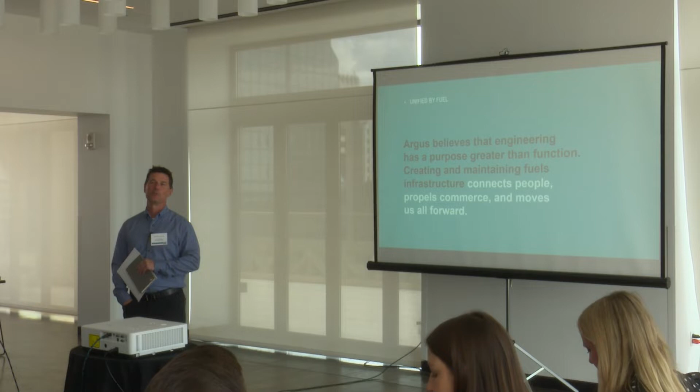A bit of current events, what's going on in the industry, sharing from our perspective what's going on and what you guys need to be thinking about and considering. And then also taking an opportunity to go to the balcony, the 30,000 foot perspective, of some of the issues that have plagued the industry, and what we're doing about it. That's what we always try to accomplish, a bigger picture away from where we normally are in consortium meetings.

There's other business that we're focused on. With this event, the idea is to share on those issues, what are we doing as an industry, and how can we get better. And then lastly, most importantly, is the networking part, which we just kind of did. We probably could have stood here for another 3 hours just chatting, but we'll do the Royals game.

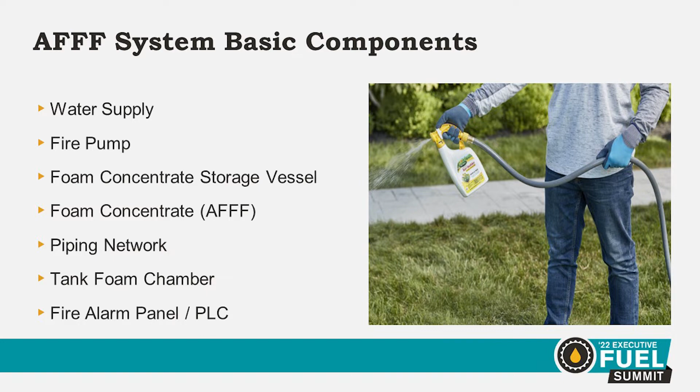Second is a fire pump, because we need a lot of pressure. We don't need the pressure for the foam system itself in the tanks. Where we need the pressure is for the cooling nozzles on the adjacent tanks, should there be a fire.

Foam concentrate storage vessel, that's where the big steel drum, the foam concentrate, the liquid that's in it, and we're talking AFFF now, today, because that's the FAA 139 rule. It's going to change, and it's going to change soon.

The piping network, so we've got the foam piping that goes up to the scuppers in the top of the tanks from deluge valves, and we also have the cooling water, which doesn't have any foam in it. The tank foam chamber, and then the fire alarm panel, which is the key to this whole thing.

It's a PLC, and it directs, depending on what you've selected. Say, for example, there's a tank 3, a fire in tank 3. By pulling the alarm, the pull station for tank 3, you activate the foam for that tank only. But you also activate the cooling nozzles for the adjacent tanks, all done through the PLC.

So the operator activates the manual pull station, the fire alarm panel, which is incidentally UL listed. It's a fire alarm panel, but it's UL listed for what they call releasing devices. So it's got special circuitry in there to monitor the release of the foam and the deluge nozzles, the deluge valves. Water flowing past the foam inductor draws foam into the water.

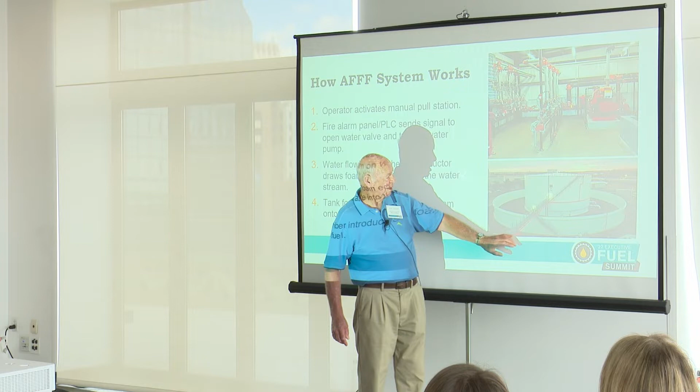And then typical, as we all know, here's the fire water, or the foam line coming across the bridge, around, and then up the side. Depending on the diameter of your tank, you can have 1, 2, 3, or 4 foam makers at the top of the tank.

Typical layout. So there's 4 here, 4 here. This is subsurface. We'll talk about that in a second. So here's your foam control building, just the lines feeding out, and it's all operated by the fire alarm panel.

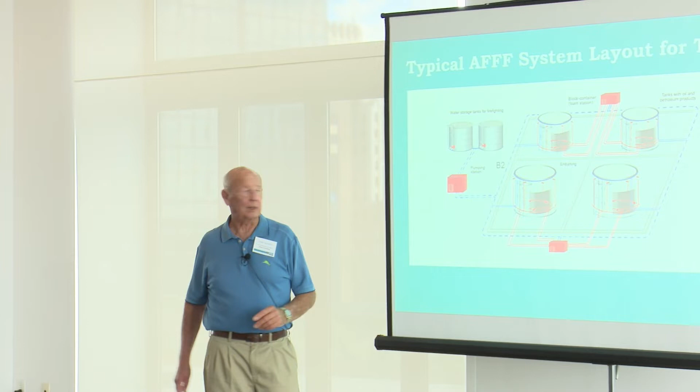These are top foam systems. This is a show of a bottom injection. So we can either have foam coming in the top, which is the normal way of doing it, but some of the older technology had bottom injection.

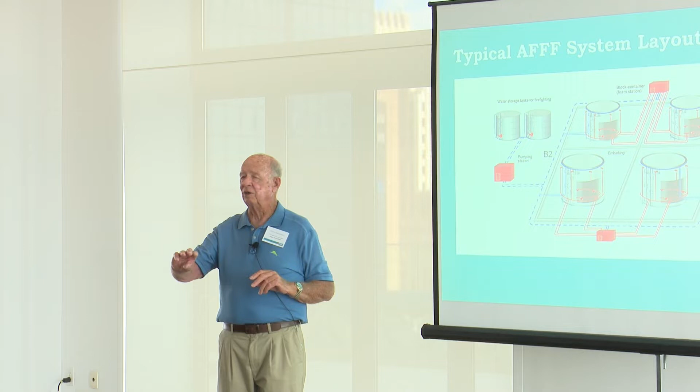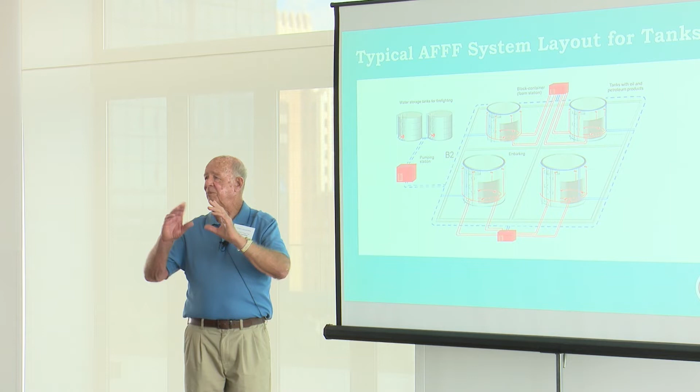And the way that works is there's a pipe and then a diffuser inside at the bottom of the tank. But where the foam pipe enters the tank, there's a burst disc. And that's sitting between 2 flanges, kind of like a blind flange, but it's a burst disc.

And if the system's called upon to operate, the excessive pressure from the fire pump bursts that disc, and allows the foam to flow in at the bottom of the tank and then float up. That's older technology, and one of the reasons it was used was in case there was any physical damage to the top of the tank, you'd still have an ability to get foam into the tank.

So we deal in maybes. Maybe there's a plane incident and it takes off the top of the tank or smashes into it and takes that foam system out. Or maybe there's a lightning strike which causes a serious explosion which could take that out. Very, very unlikely, but that was the idea behind this technology.

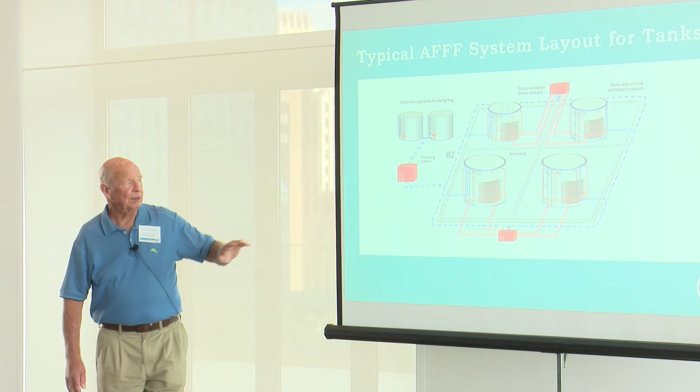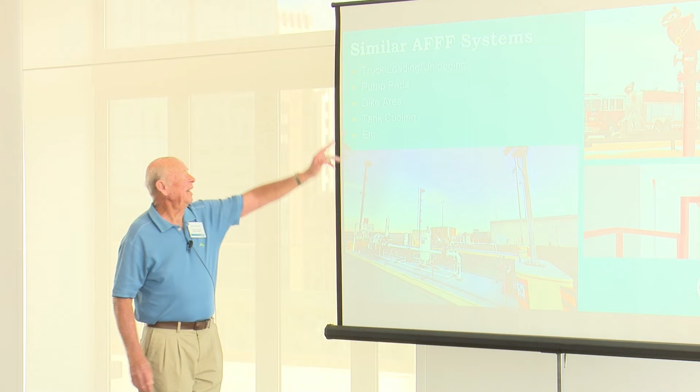Pump pads, dikes, tank cooling, and miscellaneous things. This is an example of a tank cooling nozzle. Depending on the diameter of the tanks and the shell-to-shell distance between tanks, we either have 500 or 750 gallon nozzles, usually 2 per face, so that we can adequately cover the side.

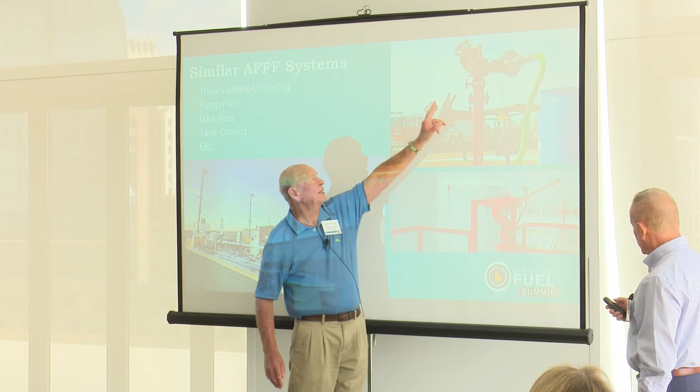So this is for a truckload, unload, or a pump pad. This is actually a foam nozzle, and you can see this is the line that draws the foam from totes or 55-gallon drums, draws it up. It's a manually operated system, usually by the fire department. You don't see them very often, but they do exist.

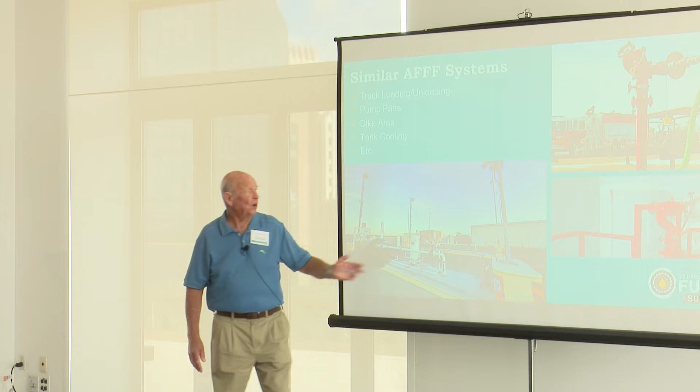And then this is obviously a filter pad, pump pad with nozzles, ultraviolet. These are UV-IR, ultraviolet infrared detectors that watch the pad, and they activate the deluge valve, which sends foam to the nozzles up on stanchions and basically just drowns it.

Questions? Everybody cool with that? All right, Joe.

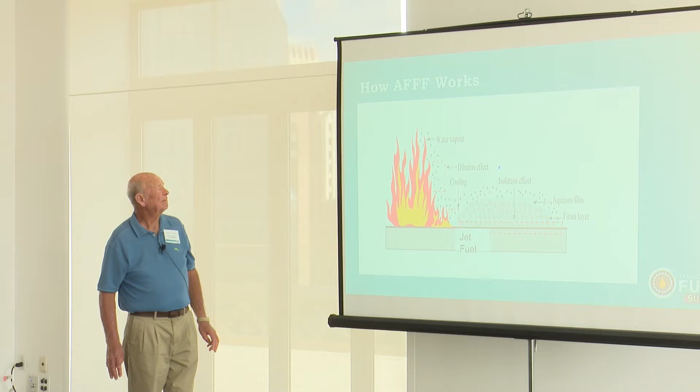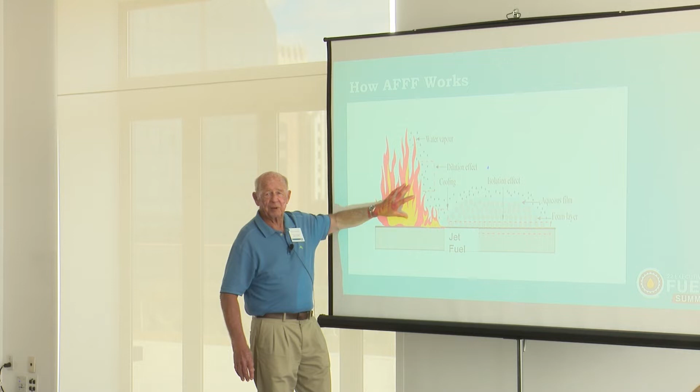Here's how it works. So you've got a fire. We bring in the foam, and what the foam does is the foam layer has got a surfactant in it, which is what's really the problem now. It's the fluorine surfactant, which allows that foam to race across the surface of the fuel. That's where the PFAS comes in. Then it isolates, cools, and draws over the top of the fire, occluding the oxygen and basically controlling the fire.

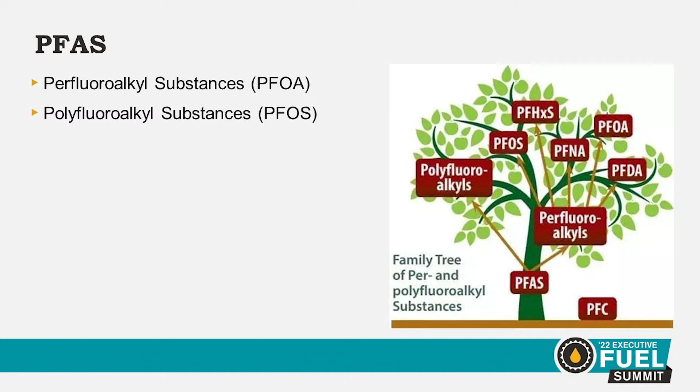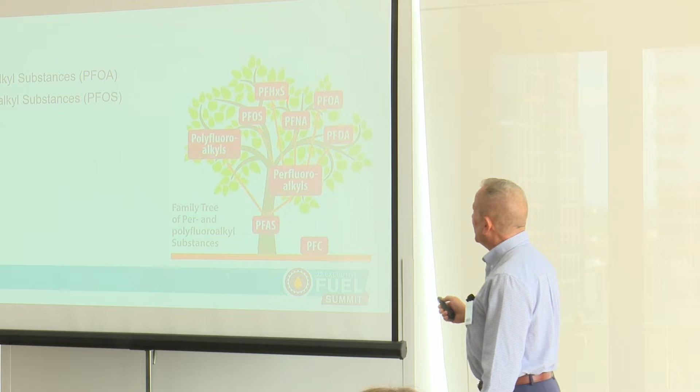Here is what I call the family tree. When I first got involved in this in Argus, it was like, what am I looking at here? This is from 40 years ago in chemistry class, and I don't even know if I studied this. But the PFAS you're hearing about today are the perfluorals and the polyfluorals. The perfluorals are up here, and right now what we're talking about at the EPA level is the regulation of PFOA and PFOS. That's the perfluorals. And then you also have these other ones off that branch, and EPA is right behind them too. They're coming for these as well.

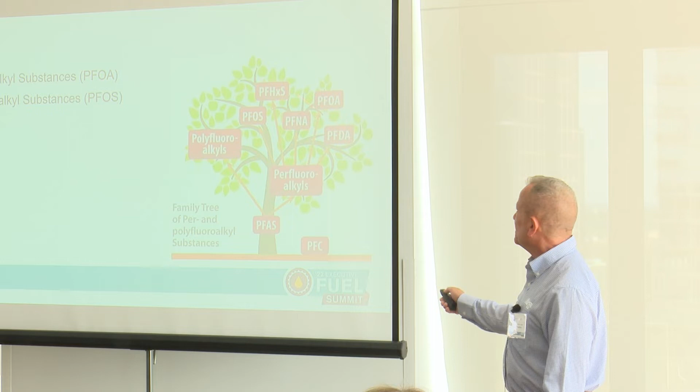And then you'll see over here polyfluoroalkyls. Those are going to be regulated in the near future as well. But the ones on the right-hand side are really what they're going after today, starting with these two, PFOA and PFOS.

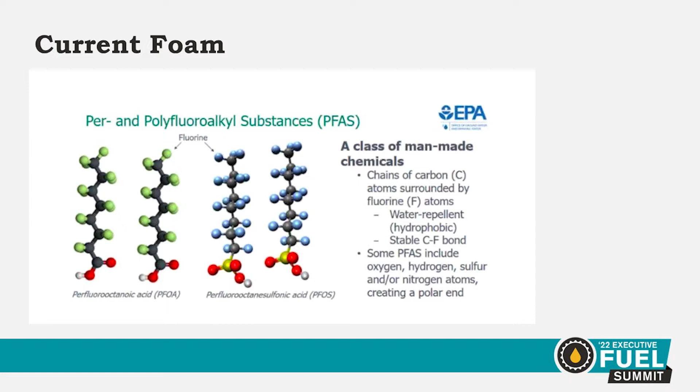Just a breakdown here of the problem we're dealing with. Here's the chemical structure for perfluoroalkyl substances. If you remember from chemistry class, you have a straight chain carbon here with fluorine molecules, either in blue or green. And at the very end here, this is what differentiates between a per- and a polyfluoroalkyl substance. Right here is a combination of hydrogen, oxygen, sulfur, and some even get creative and add nitrogen and other chemicals.

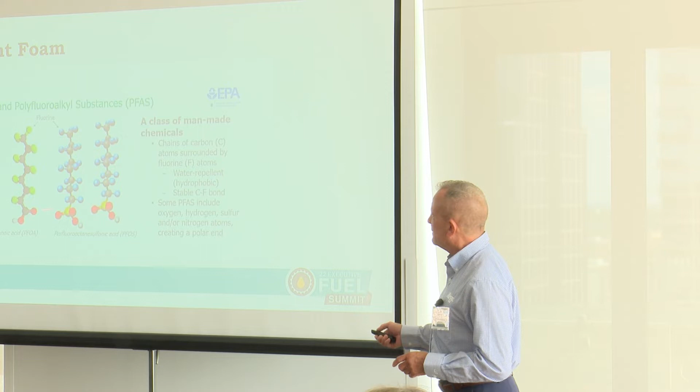The polyfluoroalkyls are when you take away a fluorine molecule here and here, or anywhere but from the end. And if you replace one of these up here with a hydrogen instead of fluorine, then you're into a polyfluoroalkyl substance. So there'll be a test on this later, folks.

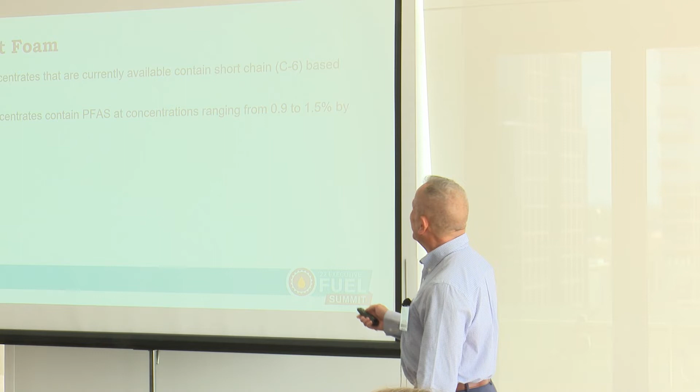As I said, current AFFF concentrates that are currently available are the short chain, C6. If you took that slide I showed earlier, which were C8s...

If you were to cut off this right here, you'd have a C6.

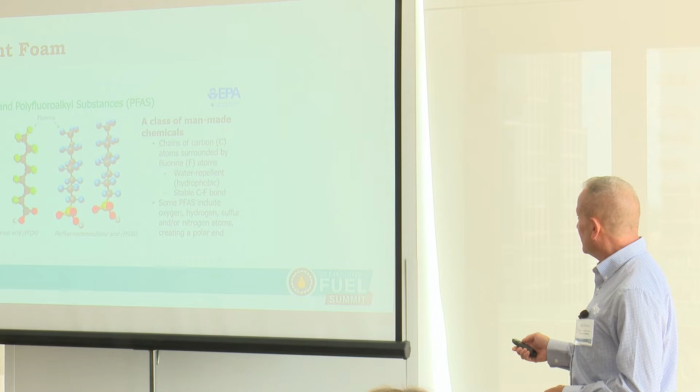And that's really the difference. That's currently what's available today for probably several more months. It's available, and that's what's in probably most of your systems, or if not, the old C8.

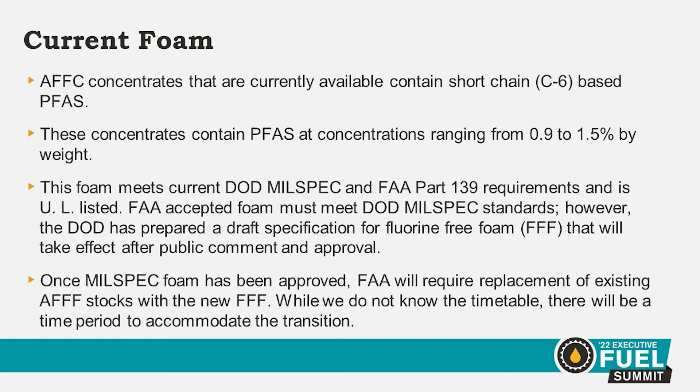Out of my own curiosity, PFAS in a foam barrel or in a bladder tank is basically only 0.9 to 1.5% concentration on average. EPA's reported up to 2% of foam has PFAS in it, so it's a very small concentration.

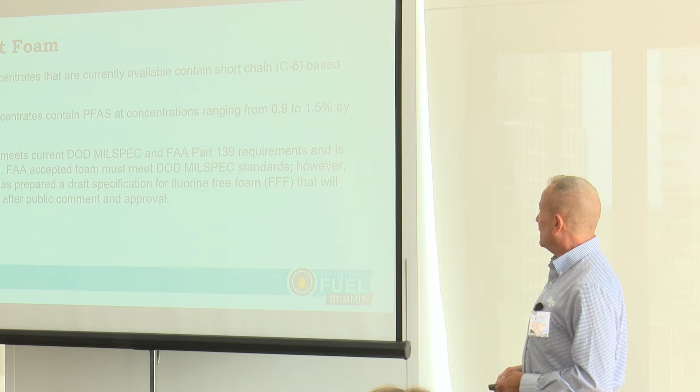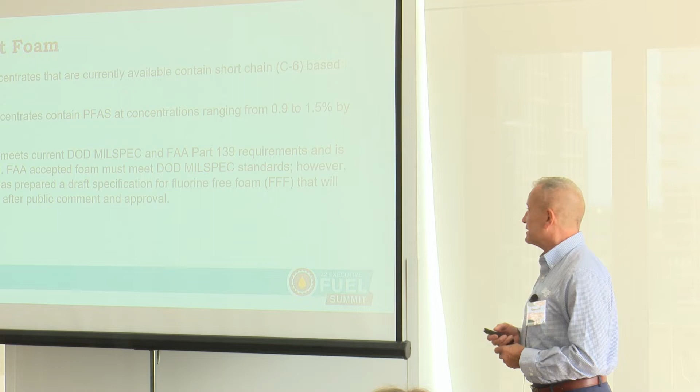The foam, of course, meets the current DoD mil spec and FAA Part 139 requirements. It's UL listed. FAA accepts the foam that only meets DoD mil spec standards. However, as you all know, the DoD is preparing a draft specification for fluorine-free foam, and that will be out for public comment and approval early next year, I believe.

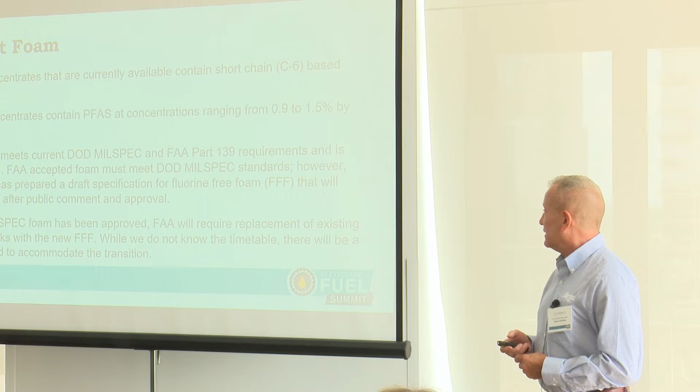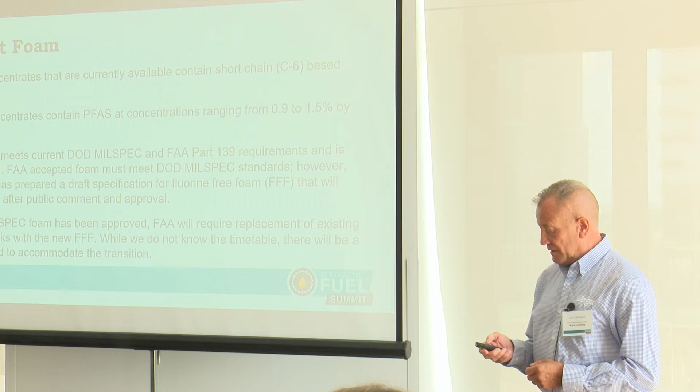Once the mil-spec foam is approved, the FAA is going to adopt that specification, and then there starts the transition to replacing the AFFF with the fluorine-free foam products, the triple Fs now. We don't know the timetable yet, but it's coming soon, very soon. It'll be next year probably, if all goes to plan at the federal level.

And for environmental concerns, releases of the C6 and C8 foam have significantly impacted drinking water resources across the United States. Once it's released to the environment, it's not easily destroyed. PFAS are not biodegradable. They're not removed by conventional wastewater treatment or incineration processes.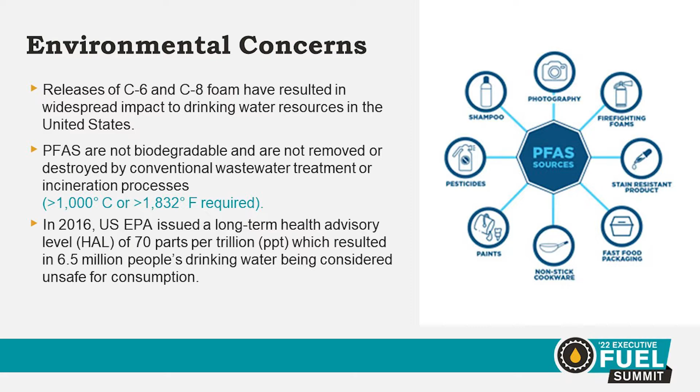You'll notice I put this here. Basically, in my research, you need to get above these temperatures to ensure that if you're incinerating PFAS contaminated media or foam concentrate, you want to get above those temperatures because there is an emissions issue from the incineration process, and they found that there's still traceable amounts of PFAS in those emissions, which is not good.

You want to try to get it completely destroyed. Some will say that they can get it destroyed up to like 99.9%, but it's a concern. So when somebody says they can incinerate it, you want to make sure that they can do thermal destruction literally at a very, very high temperature and not a conventional temperature used for non-hazardous waste.

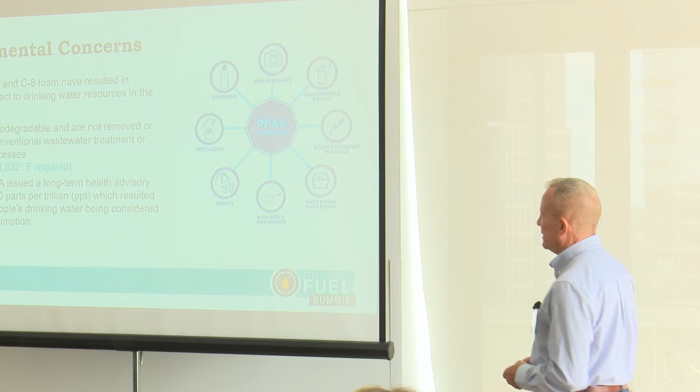In 2016, the US EPA came out with a long-term health advisory, which is not enforceable. It's a health advisory only of 70 parts per trillion PFAS. And that alone affected approximately 6.5 million people's drinking water systems in the United States alone.

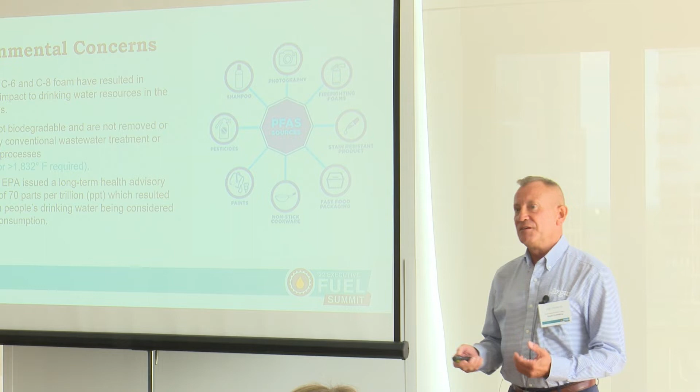When you see EPA here, the EPA, as you know, has been in a rulemaking process, and they've been going like gangbusters, for lack of better terms, for the last year. The regulations are soon to be in draft right now. They're going to be put out for public comment. But that's the extent we're going to take it, because Lloyd Landreth's going to give us an update here on the federal rulemaking and the state regulatory rulemaking processes that are going on right now.

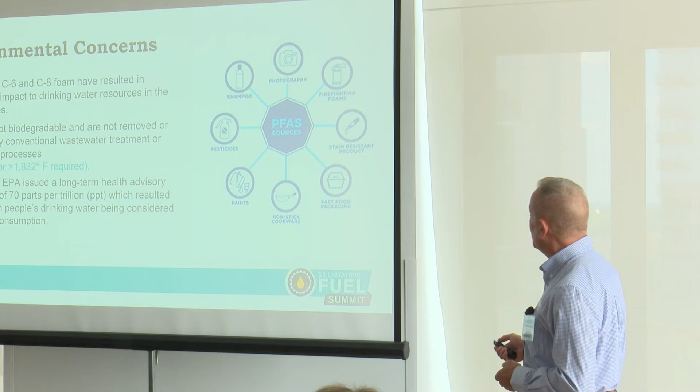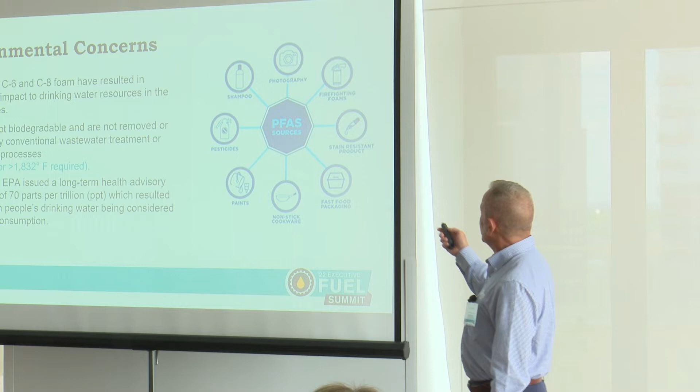On the right-hand side, you'll see here the concern with PFAS is it's not only in the firefighting foams, but it's also found in, if you can see the screen here, stain-resistant products. I mean, I love Carhartt. Now I have a closet, several winter jackets full of PFAS-containing clothing.

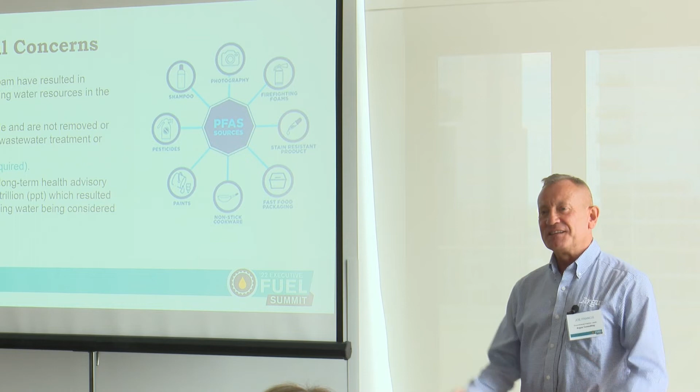Fast food packaging, it used to be the pizza boxes. I understand that still the popcorn bags in microwave popcorn actually have some in it, and so the popcorn doesn't stick to the side of the bag when you're getting ready to watch a movie. You believe that? Of course, I call this the grandfather of it all: Teflon nonstick cookware. I believe this is where the invention of Teflon has led to many of these compounds, of which the PFAS family is part.

So no good deed goes unpunished. Paints, of course, pesticides, you can find it in, even shampoo. I don't know.

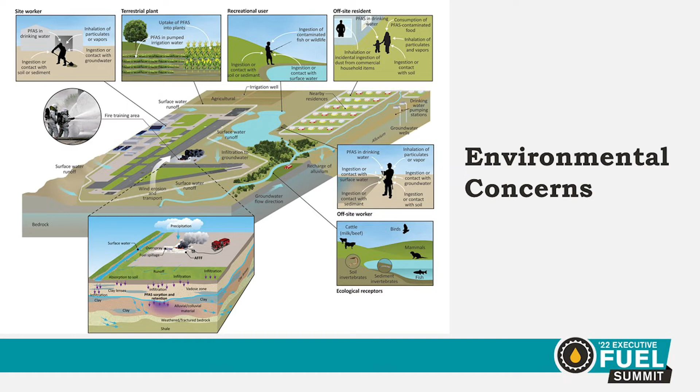You can see the various exposure pathways, how it gets into plants and animals through their diet, and then up the food chain into us. The health effects are basically cancer, liver and kidney disease, birth defects, and even impaired child growth, if exposed to high enough numbers.

If you can see the screen, there's one thing missing. Did you notice it? I have yet to find it. There's no storage tank for it. There's no tanks here.

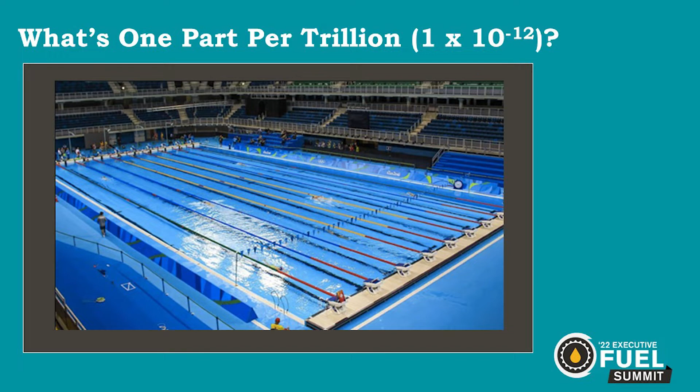So what is 1 part per trillion? Which is 1 times 10 to the negative 12th. So it's a 1 with a bunch of zeros ahead of it. Well, it's something.

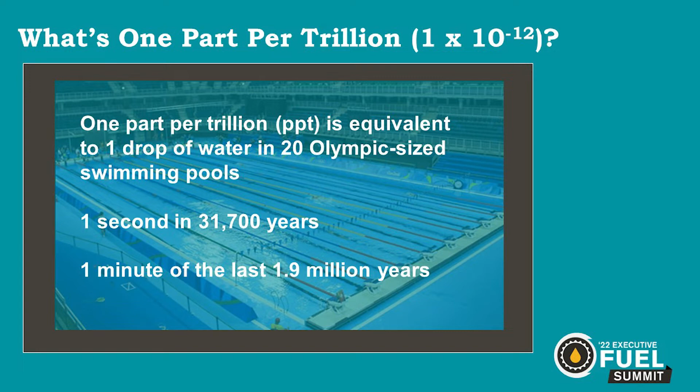1 part per trillion is equivalent to 1 drop of water in 20 Olympic-sized swimming pools. An average Olympic-sized swimming pool has 660,000 gallons. Times 20, and I think you're at 13 million some gallons of water - I'm a geologist, I'm not supposed to know that - and we're talking 1 drop.

It's also equivalent to 1 second in 31,700 years, or 1 minute in the last 1.9 million years.

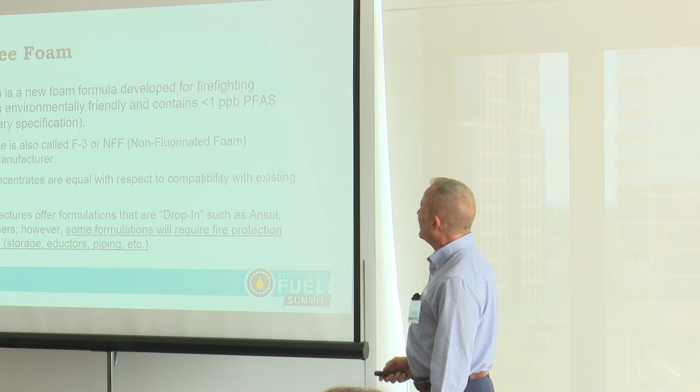So, fluorine-free foam. Now we're getting into the good stuff. It's the new foam developed for firefighting applications. It's environmentally friendly, at least it's supposedly going to be so far, and it contains less than 1 part per billion PFAS.

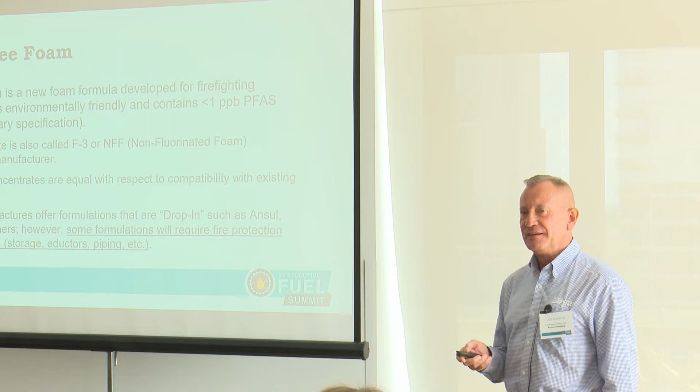Or if you read the draft military specification, less than 1 part per million fluorine, 1 part per billion fluorine. I think that may even be changed. The reason I say that, it almost seems like a high concentration, even though you're talking 1 part per billion - it takes 1,000 parts per trillion to equal 1 part per billion.

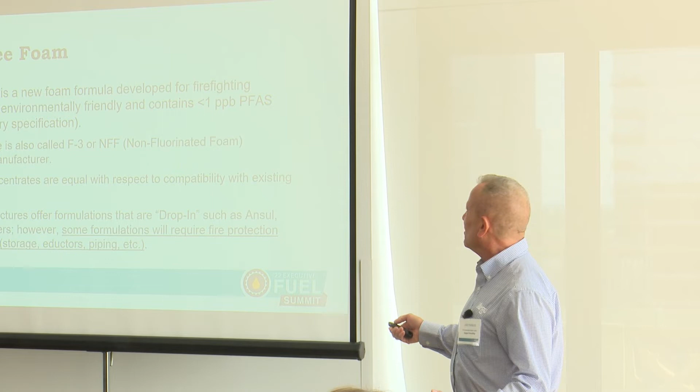The fluorine-free foam concentrate, the FFF - I'm sorry, I'm environmental, so we deal with nothing but acronyms - is also called F3 or NFF, non-fluorinated foam, depending on the manufacturer.

In the near future we're all going to be bombarded with new products out on the street. Not all these new FFF concentrates are equal with respect to compatibility with existing fire protection systems.

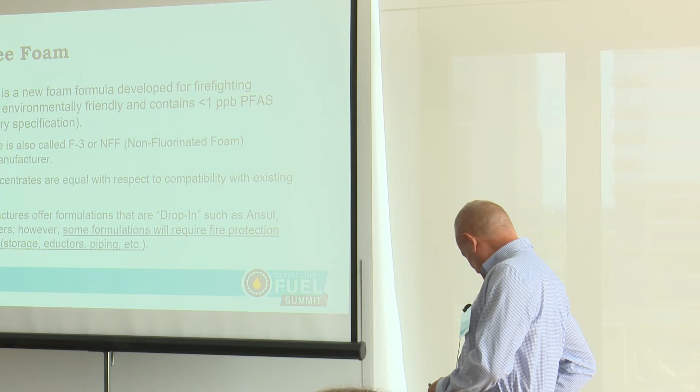Oh, I'm stealing your show. Do that last one. You got it, boss. Please step off of the ledge. I did. Oh, you did?

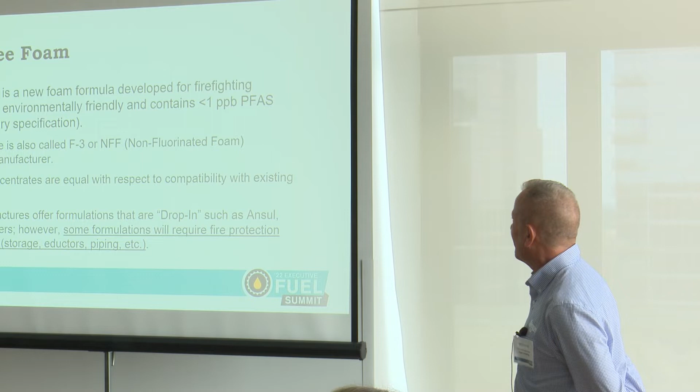So the last point here is very interesting. You have existing systems, existing bladder tanks. Some of you may have vats depending on the size of your facility, maybe a 500 to 3,000 gallon vat. For example, O'Hare Field has 2,000 gallon vats of concentrate - they're poly vats. Most of us have the tanks.

As we went through earlier, the way the foam gets into the water system, it goes out of the tank. When the valve trips, it pressurizes the outside of the bladder inside the steel shell, basically squeezing it out like ketchup. It goes through an eductor and then it's drawn into the water flow. That ratio of eduction against the pressure against the inside of the shell has stainless steel piping feeding from the bladder to the injector.

That stainless steel piping can be as small as a quarter inch or as large as a half inch. That's all contaminated - it's got the raw contaminant on it and has been since the day it was put in there. But that's adjusted for an application rate of 0.1 GPM of foam over the surface of the tank, and all that is carefully adjusted and put together on an individual basis for each of your facilities.

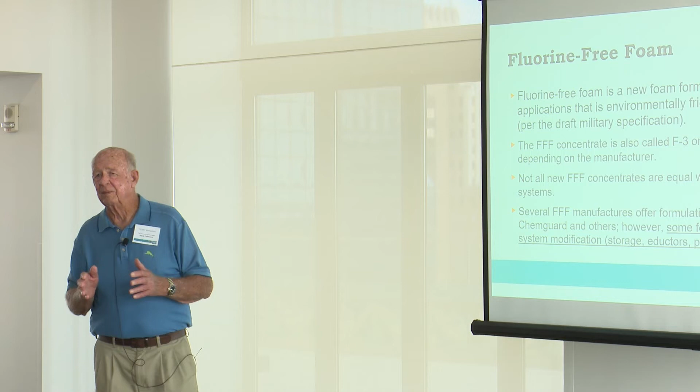If you have a National Foam system, it's a little bit different. National Foam's formula is not 1-for-1. In their UL listing tests, they found that their surfactant wasn't as fluid as some of the other brands, some of the other chemical compositions, so it doesn't flow as easily. A National Foam system would be anywhere from 1.2 to 1.8, 1.9, as opposed to 1-to-1.

That would require new equipment - a larger tank and a new eductor, larger eductors. So you may... nobody knows right now, I'm just throwing this out... you may, if you have a national system - there's no rule that says you can't put Ansul foam in a national tank. So that may be an out, but we don't know yet.

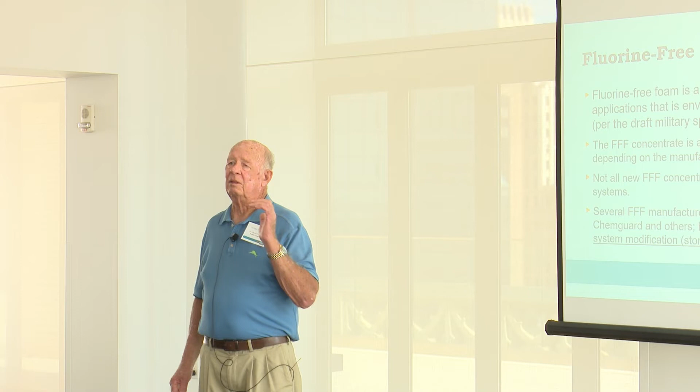National hasn't been through all of the labs and the acceptance. Ansul has. Now, for those of you with systems that have spray foam on a pump pad, a filter pad, or a loading rack - in the loading racks we would use non-aspirated sprinkler heads to spray foam up in the top of the rack. Ansul has got a product coming out late fall that's going to be a foam concentrate that can be used, once again, one-for-one, on those systems where you have a sprinkler head, a spray nozzle, or the curlicue pigtail style throw nozzle.

So right now, you've got the AFFF in there, it works. In the future, you're going to have these available to you for those systems. Well, they say, don't jump off the ledge yet - we're talking some serious money here. So, can we? All right, back to you.

Okay, under the Federal Aviation Administration now - and to help answer your question, they failed to meet their goal of October last year, I believe. Under their Reauthorization Act of 2018, they had a provision requiring the FAA to change its standards for firefighting at airports by October 2021 to no longer require the use of AFFF. In my opinion, they basically waited up until the last minute. They knew they weren't going to meet the goal, and they kind of punted over to the Department of Defense and said, you need to get this, more or less - we know you're having a spec coming, we're going to adopt that, like they did the mill spec for AFFF.

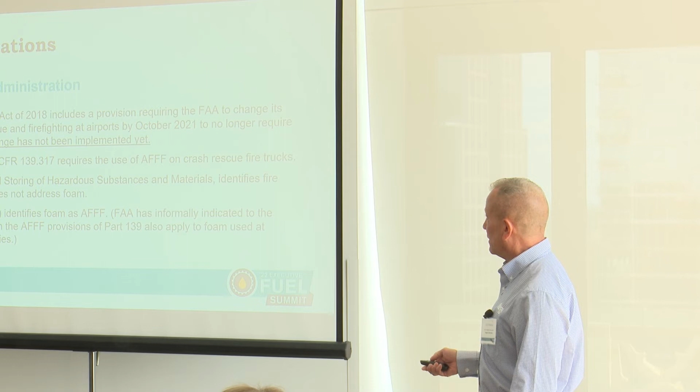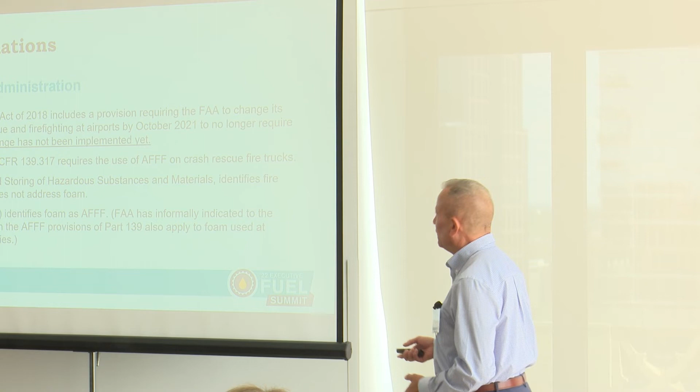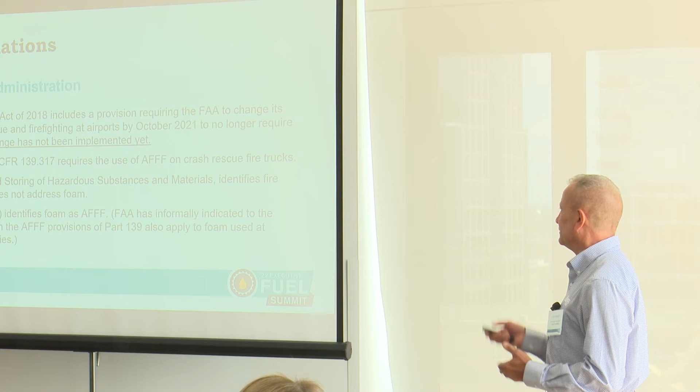And then you get into FAR, or 14 CFR Part 139, which requires the use of AFFF on the aircraft crash and rescue fire trucks at airports. Section 321 of that rule requires the handling and storing of hazardous substances and materials, identifies fire safety and fuel farm, but does not address foam. However, under the definitions of 139.5, foam is identified as AFFF. And as many of you know, the FAA has informally indicated to the airlines that, in their opinion, Part 139 also applies to the foam at the bulk storage terminals or airport tank farms as well.

So just when you thought that you had to just satisfy the FAA, look who came down the street - we've got the NFPA rules and regulations, which are, by definition, part of the fire code. So they're in the back of the fire code. It lists all of these NFPA documents as having the force of the code.

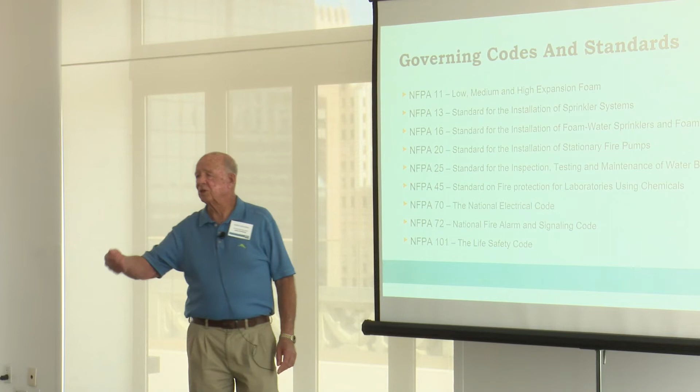So we've got the foam, the sprinklers - and 13 is the sprinkler piping system. The foam rules and regulations don't talk about pipe, we have to go to 13 to talk about the pipe and the deluge valves. And then we've got foam water sprinklers and water spray for the pump pads. Then we've got the pump. Then we have testing, then we have the chemicals. Then we have the NEC, the signaling, the fire alarm code, and a life safety code.

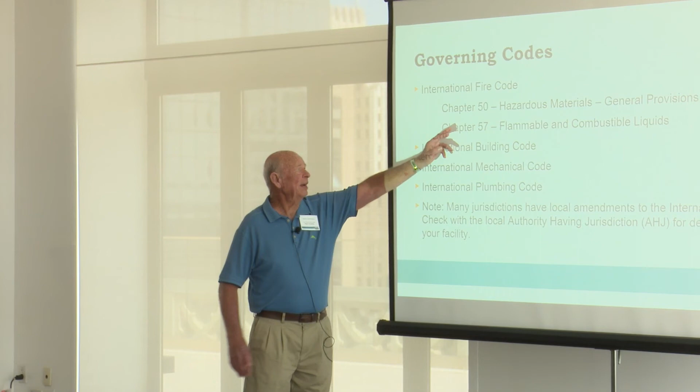And if that's not enough, we also have the fire code, chapters 50 and 57 - those are the two that deal with the subjects we're talking about here, whether it's storage tanks or spray nozzles or loading racks, things like that. The building code, mechanical code, plumbing code, and then most jurisdictions have what we call local amendments. So if it's a more sophisticated municipality - for example, the New York Port Authority - they have their own rules and regulations, and everybody else be damned.

Los Angeles, San Francisco, Houston, Dallas, Fort Worth - each one of these places takes these rules and regulations and twists them to how they want to do it. So for any of your facilities, if you want to change anything, and when we go to the fluorine-free foam, they're going to get involved. So best off, get them up front. Bring them in the day before you decide to do it and say, here's what's going on. And the fire departments, by the way, and the building departments, they're totally aware of this too because they have a lot of foam. They got to deal with it.

And if that's not enough, as Joe was mentioning earlier, he didn't have something on his big wheel - firefighter gear is loaded with PFAS. That's what makes it fire resistive. So the fire service is also in a dither about this, how they're going to handle it, because the guys put this coat on and the pants and now they're exposing themselves to known carcinogens. Cancer in the fire service is now a big problem, and it's being recognized finally as a big problem. So everybody's totally aware of this and everybody's on pins and needles. They're not gonna say, sucks to be you, because it sucks to be them too. So I think we're going to find that we're going to have a nice level of conversation to be had with the authorities having jurisdiction.

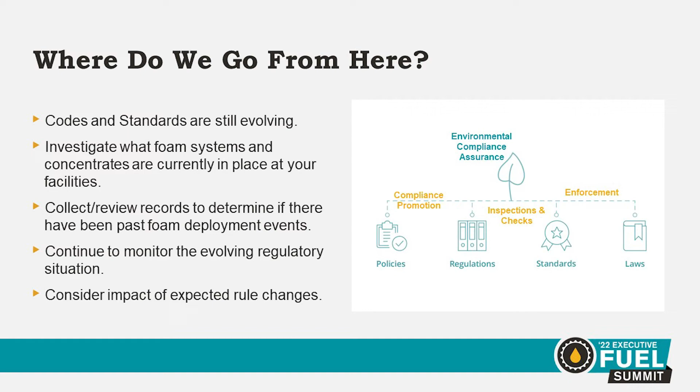The codes and standards are still evolving. We recommend that at the tank farms, the fuel farms, that the owner or operator investigate what foam systems and concentrates are currently in place at your facilities, then collect and review records to determine if there has been any past foam deployment events, and continue to monitor the evolving regulatory situation - which we'll probably know a lot more about at the start of next year - and then consider the impact of the expected rule changes we're discussing here right now. It should be, if all goes to plan, a very exciting year ahead of us.

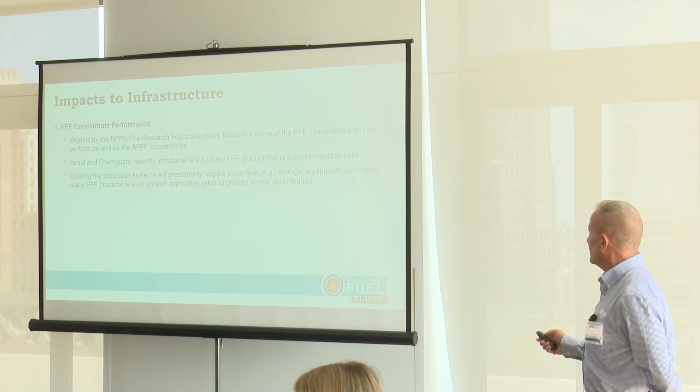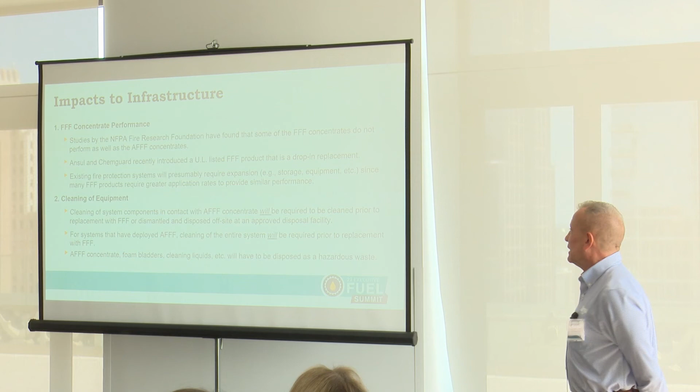The cleaning of equipment - cleaning of system components in contact with the AFFF concentrate will be required to be cleaned before replacement, or dismantled and disposed of off-site in an approved disposal facility. I don't know at this point in time what is going to be considered clean. There's triple rinses, water rinses that are being proposed to clean an existing, say, pipe - versus there's some solvents that some patents have been taken out on by consultants and so forth, seeing that this is a very ripe opportunity in the near future here, that can say that they can clean a pipe of PFAS residuals.

It's probably going to be very expensive, and either way you go, if you use a patented solvent or a triple water rinse, we don't know what that level of clean is yet, as to what the regulatory agencies are going to allow to stay inside a piece of pipe that's been exposed to AFFF and water.

You may reach the conclusion of how much you're willing to invest in cleaning a pipe versus replacement of one. That's going to have to be considered on a site-by-site basis.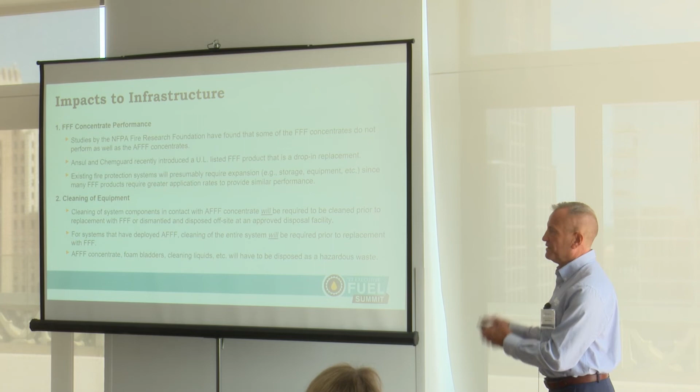Also, if your system has ever deployed foam, you're going to have to clean it or replace it. You just don't want to contaminate fluorine-free foam with PFAS residuals. And last, given though, the concentrate, the AFFF concentrate, the foam bladders, the cleaning liquids are all going to have to be disposed as hazardous waste.

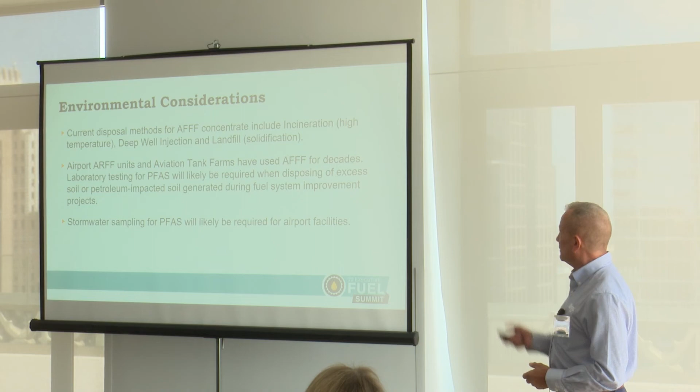Other environmental considerations to think about: right now the disposal methods for AFFF concentrate are incineration at very high temperatures, deep well injection, and landfilling the concentrate. Landfills, a hazardous waste landfill, can mix the concentrate with the liquid to make it a solid, and then put it in what they consider a secure cell in a hazardous waste landfill.

I think landfilling is the least preferred method of disposal, from what I've heard of others, whereas incineration and deep well injection seem to be the way right now to minimize your liability when it comes to disposal of this hazardous waste, the PFAS.

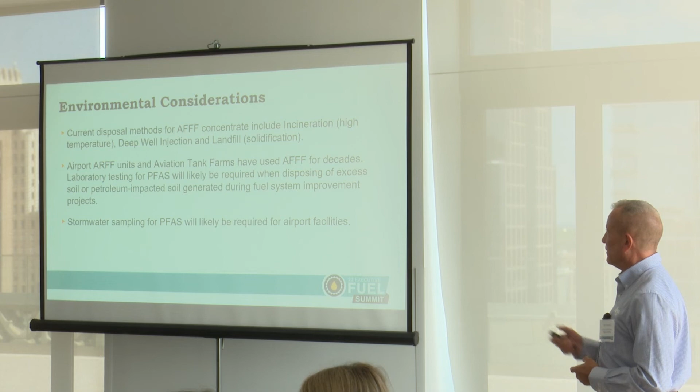One note here is airport ARFF units and aviation tank farms have used AFFF for decades. Laboratory testing for PFAS will likely be required when disposing of excess soil or petroleum impacted soil generated during a fuel and system improvement project.

In my experience, just replacing hydrant system lines, by either removing them or replacing them with newer lines, you're inevitably going to come across petroleum contaminated soil. It's not saying that it has PFAS in it, but the fact is that the ARFF units have sprayed foam over the airport as needed.

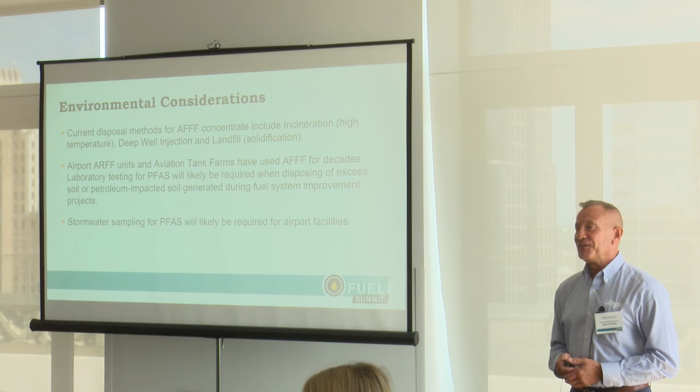An engine fire, I've seen, they really make sure that they put that fire out. And where does all that foam go? It goes right into your infields, most of which are grass covered. They have fueling pipe going through them at depth.

When we get in there to excavate and we have excess soil or we come across impacted soil, we're going to take it off to a landfill. That landfill is going to want it analyzed for PFAS today, to make sure that we're properly disposing of that material.

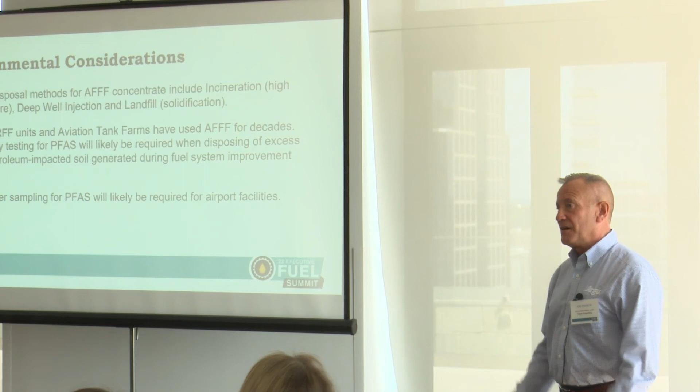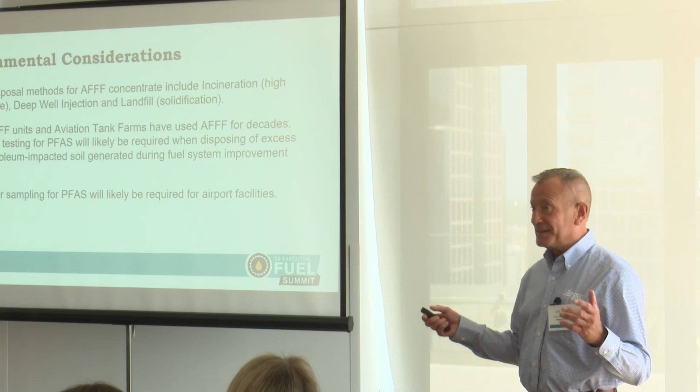So that's something I just saw, it could be an increase in cost. On some of our projects we're generating a lot of petroleum impacted soil, and in the future we're going to have to be analyzing for PFAS in that. If anything, it's an added expense from the laboratory. Let's just hope that all the numbers that come back show no detections, which is ideal, but if there are, they're very low and below the standard that's going to be established by the EPA.

From my own background, stormwater sampling for PFAS will likely be required at airport facilities. I can't help but think that, just like how they approached de-icing fluids, the airports have a big bullseye on them right now.

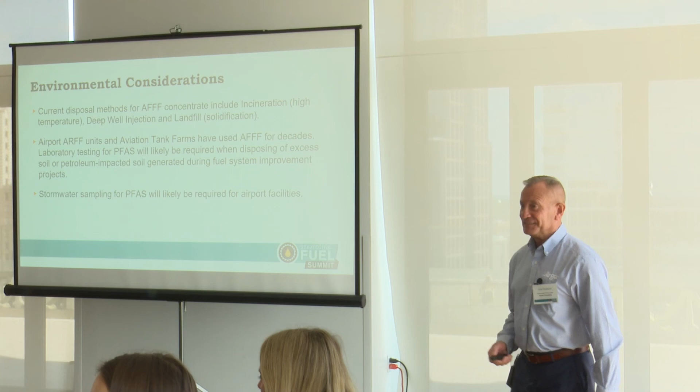I can't help but think that there will be people advocating for sampling the outfalls and seeing if this is in there. I think it's been touched on at some facilities, and I just can't help but think that they're not going to let this go easy. I hope that makes sense to you, but the environmental people are really after this AFFF, or the AFFF regulations.

For disposal, from what I've found out so far, and these are today's costs for non-hazardous waste: in South Texas, AFFF concentrate typically ranges $3 to $6 a gallon to dispose of in a deep well. Incineration is typically $3 to $5 a gallon. Incineration of PFAS contaminated soil typically ranges from $400 to $600 a ton.

That is not cheap. Disposal fees, again, this is all costs based on non-hazardous waste. Disposal fees are expected to increase once PFAS are designated hazardous substances by EPA, and that's in Lloyd's presentation on when that rulemaking is coming.

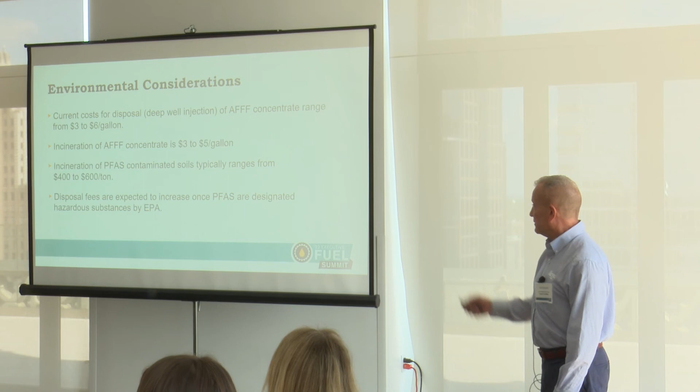So what should you do? We've broken this down into 3 scenarios, the first of which is an existing facility with no planned improvements for modifying the tank farm whatsoever, just waiting for this regulation to come through and wait till the MILSPEC is approved for use by FAA.

Evaluate today if your existing fire suppression system requires upgrades for the transition to fluorine-free foam. And then cleaning of existing equipment will be required if it's been exposed to the AFFF.

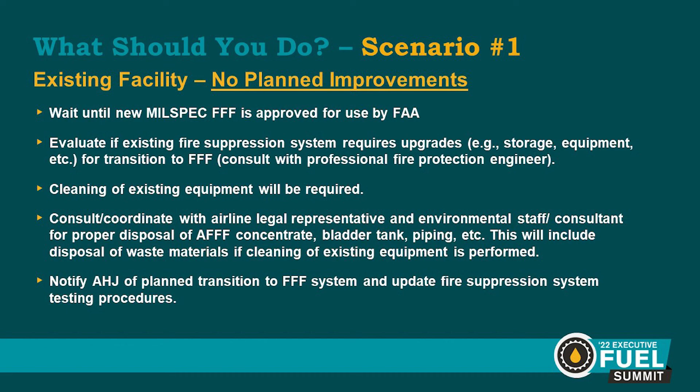My advice is to coordinate with your airline legal representative, environmental staff, or consultant for proper disposal of the concentrate, the bladder tanks, the piping, etc. This will include disposal of waste if cleaning of existing equipment is performed. Again, you're going to be creating a liquid waste stream by doing that.

And then last is notify your authority having jurisdiction of planned transition to a fluorine-free foam system and update fire suppression system testing procedures. That would be discussed with the authority having jurisdiction.

For scenario 2, you're an existing facility with planned improvements. Design the fire suppression system using components compatible with the fluorine-free foam, and evaluate if existing equipment can be reused.

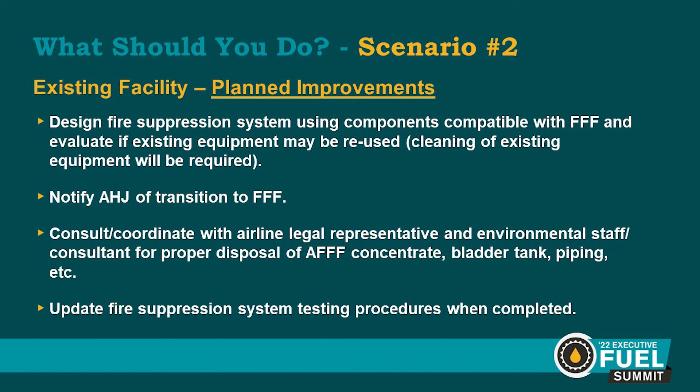Again, if it's been exposed to AFFF, it's going to have to be cleaned in all likelihood. And what I can't tell you is what is considered clean today. How clean is clean? And then, of course, notify the authority having jurisdiction of the transition to the fluorine-free foam.

Again, coordinate with the airline legal representative and your corporate environmental staff or your consultant for proper disposal of all the concentrate and other waste materials that you're going to be generating. And then, again, update the fire suppression testing procedures for the facility.

The third scenario: improvements under construction. It's easy for me to say this, but delay implementation of any foam going into a new system if you can. You just don't want to introduce AFFF to a piece of equipment only knowing that it'll probably be removed in the very near future and replaced with fluorine-free foam.

So again, I can't stress too much, but communicate with the authority having jurisdiction, as Terry indicated, of the planned transition to the fluorine-free foam. And then redesign your fire suppression system to make sure it is compatible with the fluorine-free foam.

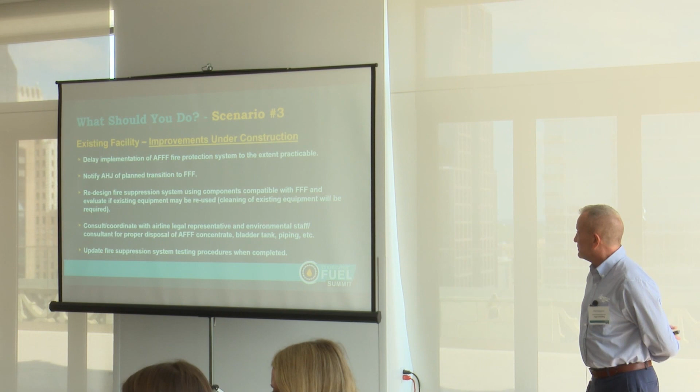Again, communication is the key here. Coordinate with the airline legal representative and your staff or your consultant when it comes to proper disposal of any waste materials. And the last but not least, update the fire suppression testing procedures.

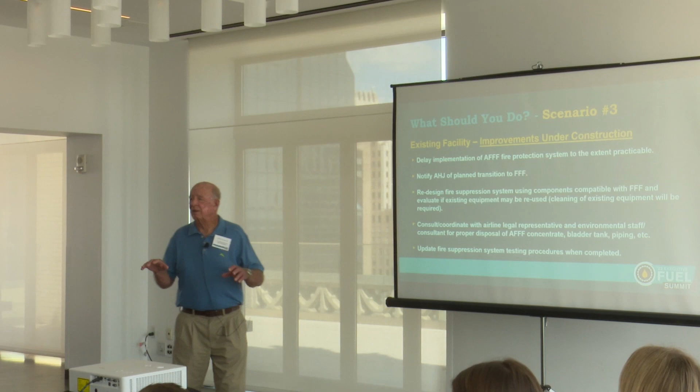That's it. I want to expand on that last one we just saw. If you've got a system expansion and you're in the design stage or the preliminary budgeting stage, continue what you're doing, but make sure the designers, whether it's mechanical, fire protection, electrical, or anybody, are aware that these things can and will change.

But we don't know to what degree. I'll give you an example. I know of one airport right now that's got tanks under construction, and what we're suggesting at this particular airport is don't do anything different. The system was designed using Ansul equipment, so go right ahead with what you're doing.

But let's say, for example, it was designed using National Foam or Solberg or any of the other half a dozen foam manufacturers and their equipment. I would suggest at this point, stop. Let's let the dust settle. It's only going to be a couple of months, unless you desperately need those tanks back online. I would just cool it for right now because we just don't know.

Now, the existing AFFF foam runs roughly about $29 to $35 a gallon. The fluorine-free foam looks like it's going to be just a little bit more, maybe 8 to 10% more per gallon. But when you're looking at tanks that are going to hold 200 or 300 gallons, do the math. That's a lot of money to throw away if you're going to put AFFF in there just for 6 or 8 months. It's your call, but just be really careful about that one.